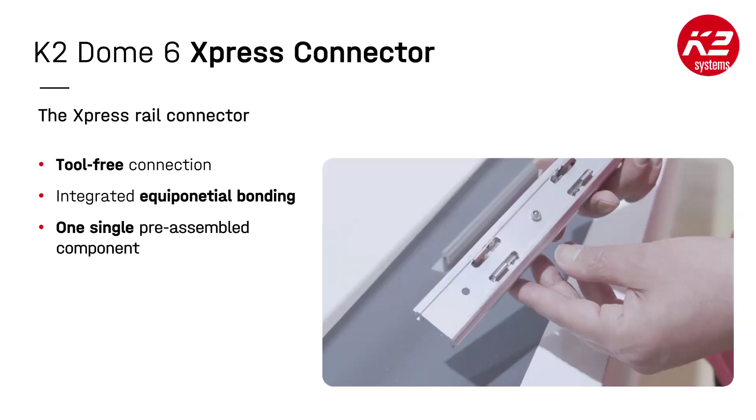We want to design our Xpress systems tool-free, so that everything you can install without tools, just by clicking it. Let me show it live, since the video is going and going. This is our new Xpress connector. What is the idea of it? Maybe you can understand it.

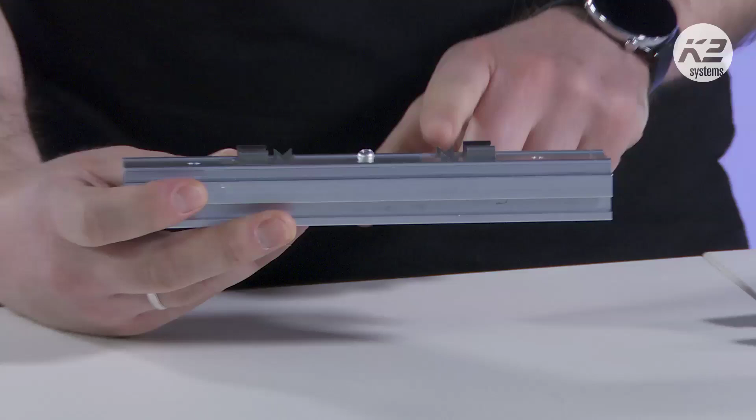We have our basic rails for Xpress systems with drilled holes in the profile, and you have this connector with two types of clips. One of them goes inside the rail, and another one with sharp edges is for equipotential bonding. From the other side, you move the parts.

So to install it, you just put the connector inside the rail, then move it upwards and push it inside. It clicks in, everything installed, no tools needed. Then you get the second rail in the same way, so the rails are connected without any tools. You can also take it out by the thumb, push it to the top, and remove it.

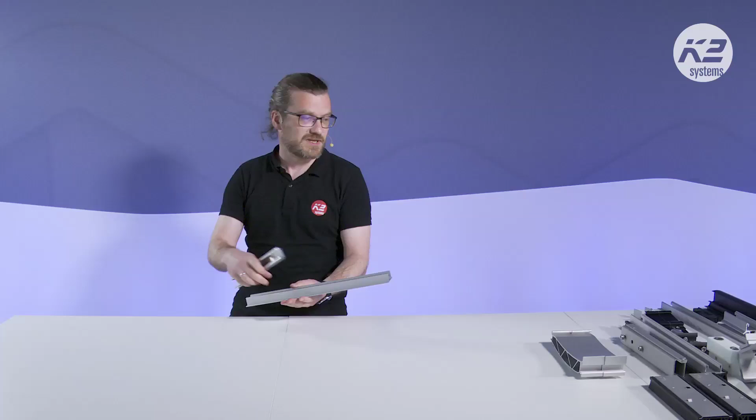As you can see, there are two options: it's not only a tool-free connector, but also equipotential bonding without additional components, without TerraGrips.

Our next important update is our new system, Xpress LS system. As you know, modules are getting bigger and bigger, and modules bigger than 2 meters are usually not allowed to be clamped on the short side, and especially not in the corners on the short side, as in our classic and Xpress systems.

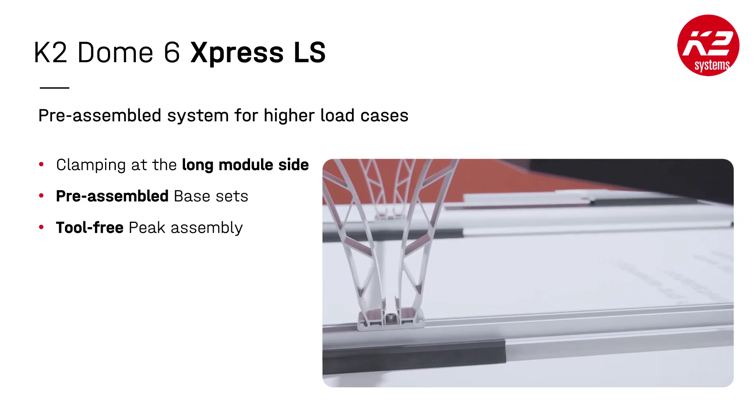We already have our classic LS system, which clamps the modules on the long side. Now we developed the Xpress LS system, so you can install it much faster and simpler - I'll show later how to do it. The idea is the same as for our Xpress systems: you get pre-assembled rails and just have to click the pieces in.

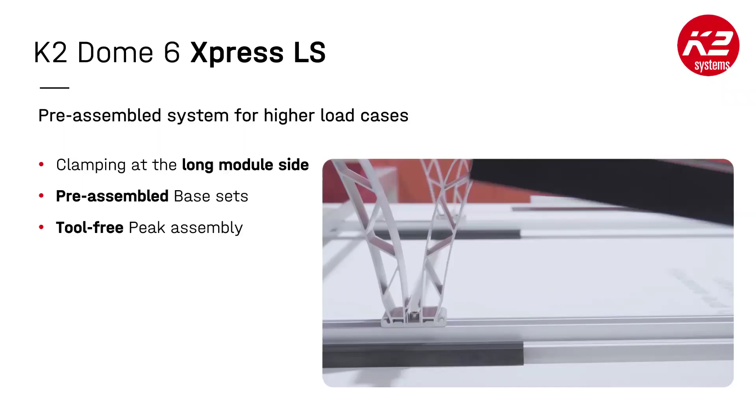Regarding the price, I checked already for some of my projects. I'd say the difference between classic LS and Xpress LS is something about 10-15%, so it's really a good deal. If you think about how many labor costs you'll save, it's really sufficient. So check it, try it - I'll show you later how to design it in K2 Base, because it's already live in K2 Base.

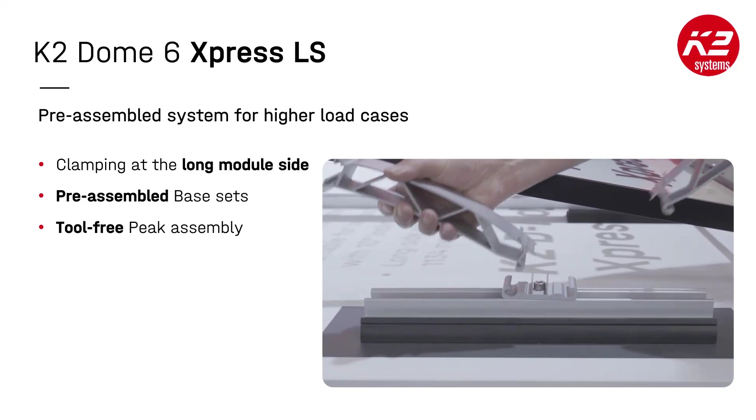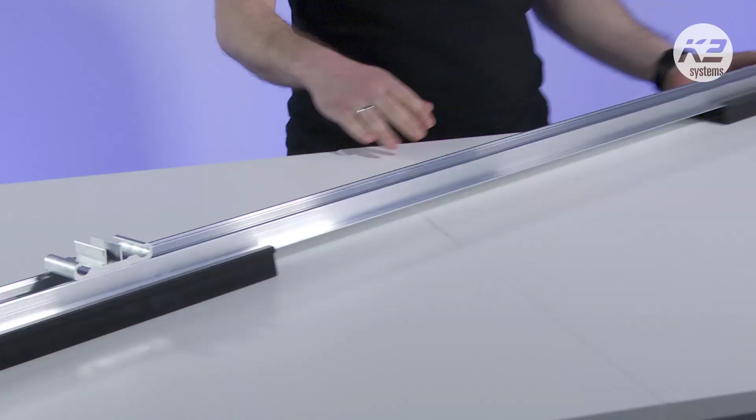But now let me show you the rails, the Xpress system as it is. As you know already from our Xpress system, everything comes pre-assembled. You have the rail, and on the rail are already installed our mid clamps. The SD is already installed, and here are mid clamps to mount the pieces. Everything is pre-installed, you already have the correct distance.

Important to mention, the Xpress LS system is only for modules with 1134mm module width - so it's only for these models, but nowadays almost all models have this width. And it's for modules up to 2.5 meters length, so really long modules. Installation of the pieces is similar.

It's also important to mention that we have different SDs here. Do we have something to compare with the old one? Not really - do we have some old SD? Wait a moment, we will get it for you.

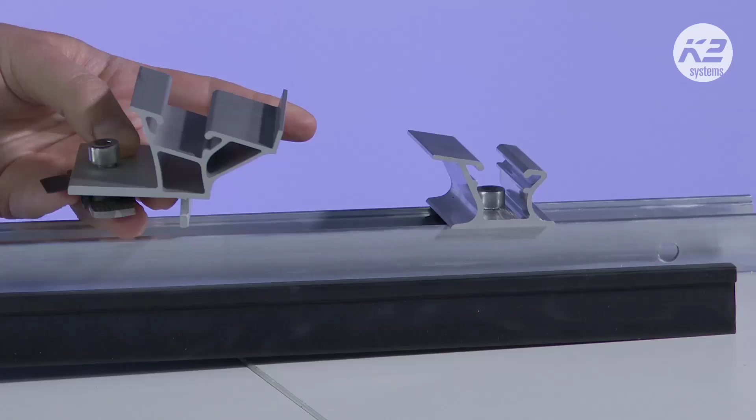So maybe just to compare, here's the old one, here's the new one. You will see that it's smaller, with less material, so it's also a bit cheaper. You will save a bit of money on it. And the same here with our mid plate, it also got a bit smaller with less material. So installation is now a bit different, but quite the same as it was.

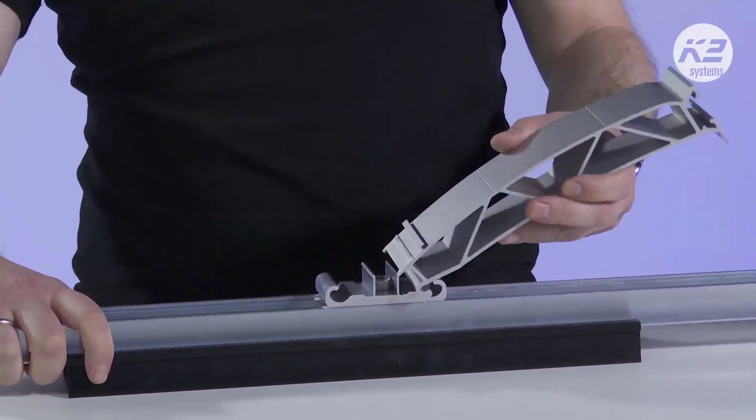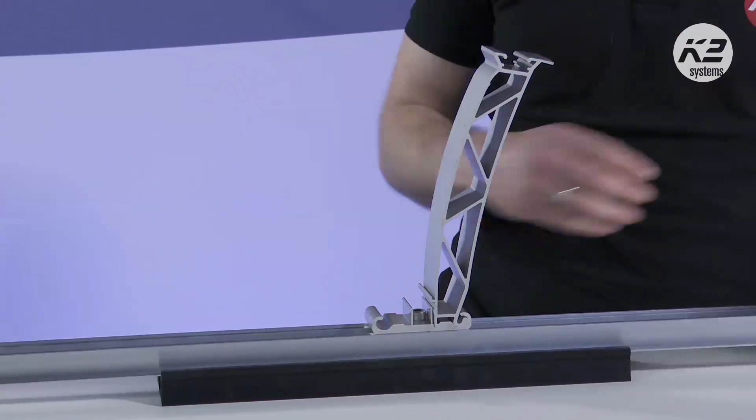You just click the peak in, here, and just here as it is. Now it is in. Now it's installed. You don't need any screw, because if you put the module on top and connect it by clamps, there's no way the peak will go out again. And the same with another one. So now you just put in the clamps, and you can install your modules. In the same way, you can get them out if you need.

It's very simple, as I mentioned, without any tools. No screwdriver, anything.

So maybe let me show it in Base, how to find it in Base, how to design it in Base. So let's maybe create a short project. I don't know, somewhere in Brno, maybe.

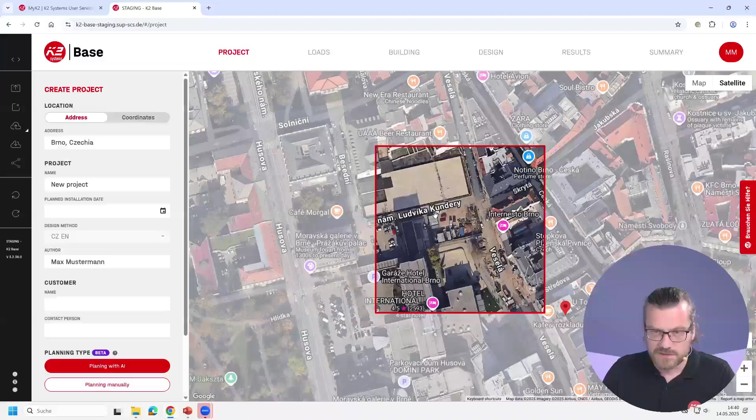Oh, there's already a nice flat roof. So let us check this. Take this one.

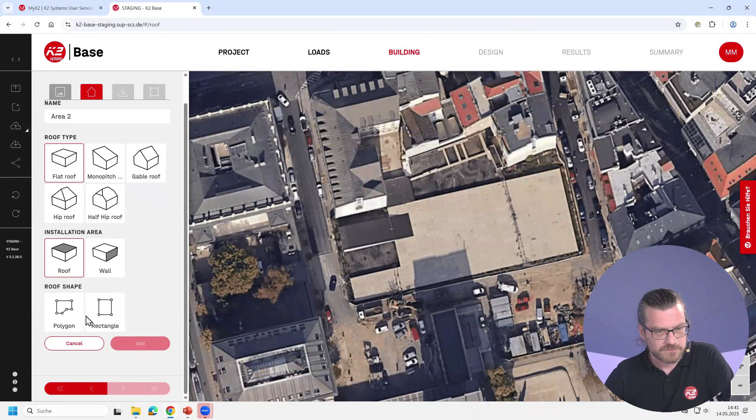I will not explain the meaning of all these options to select, we will do it in our usual webinars, like for flat roof, for example. So here, flat roof. Just design the roof.

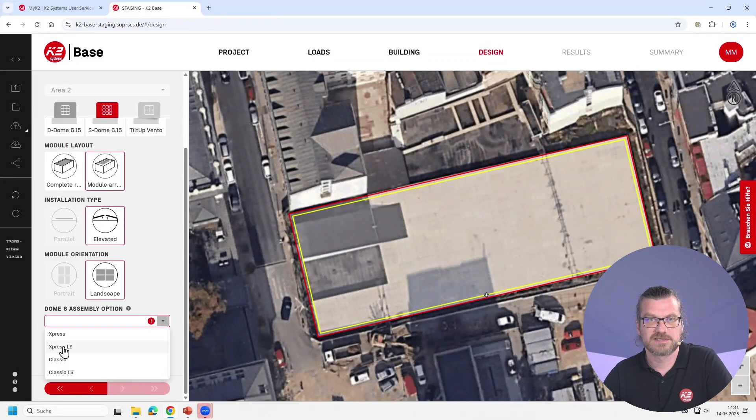Now here you have the option to select the system. You select D-Dome 6.15, and now you can select Xpress LS system here, and you just put it on your roof.

Another advantage of our Xpress systems is that bigger module blocks are allowed in Xpress systems. So maybe you will be able to reduce a bit of ballast with it as well.

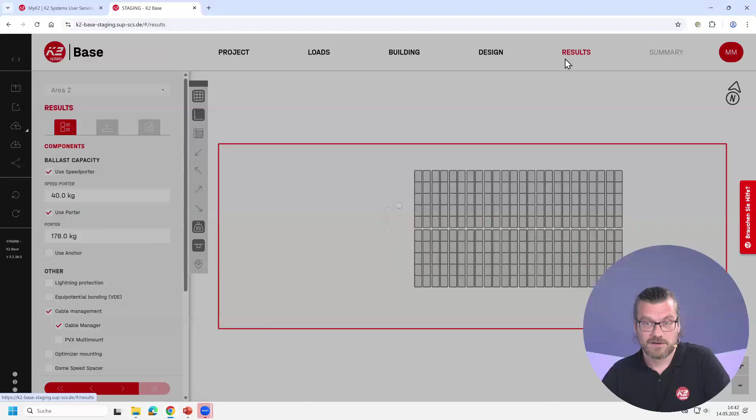Under results, or maybe not under results, but in our bill of material, you will see that we get here our basic set, the same basic set I just showed you. And here you will just need additional peaks. And the system is ready to go.

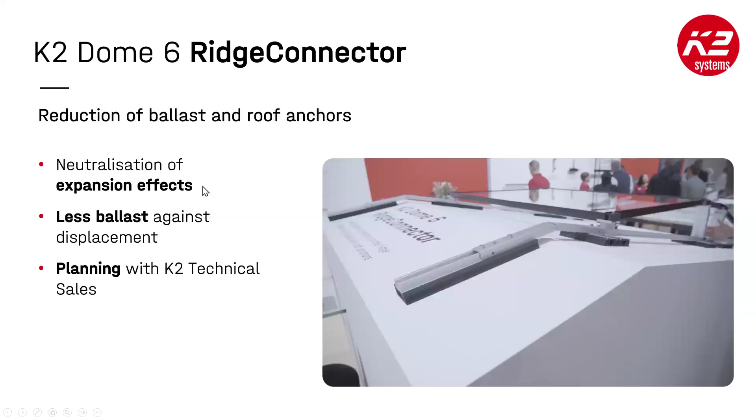Let us proceed with our presentation. The next part we want to present to you is our ridge connector. Here is a video from our Intersolar booth.

The idea of the RidgeConnector is very simple. As the name says, it's to connect the rails over the ridge. We can calculate it manually for you already. It's possible to install this one for roofs above 3 degrees until 10 degrees.

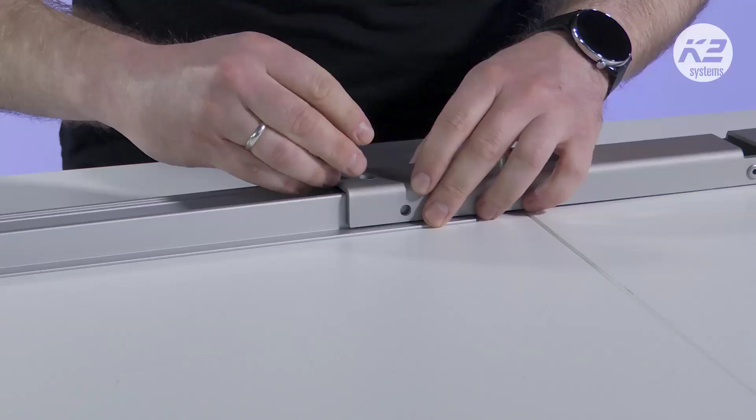Installation, you will see it with our well-known MK2 nut. Just put it inside the rail, and fasten it by 2 screws, in this case by 2 MK2 nuts, 2 screws. I will show you only with one. It's already installed.

The idea of it is to reduce the number of anchors, or maybe avoid anchors at all, because this ridge connector will replace the anchor, so it will keep or protect the system from sliding down, what our anchors usually do. But I will say right away that the ridge connector will not replace ballast, because ballast is also working against uplifting, and the ridge connector is not working against uplifting. So you will still have to use ballast, even connecting module blocks over the ridge.

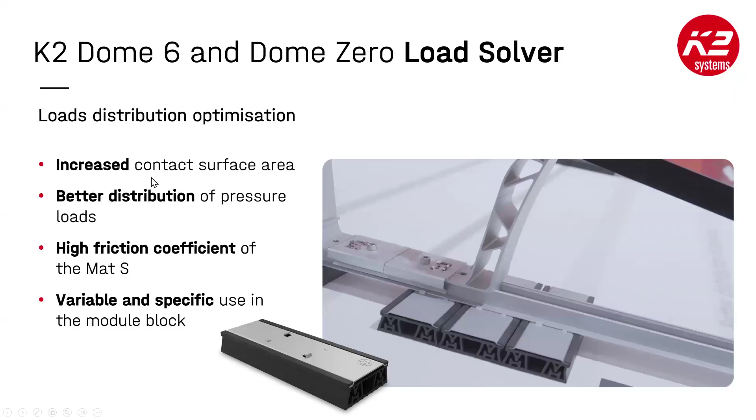Okay, what else we showed at Intersolar? It's our load solver. The idea is very simple. Maybe you can show it here on the video already, but maybe just for understanding.

So we are talking now about pressure on insulation, because if you had soft insulation, you may not put a lot of pressure on it, because otherwise it will go under the pressure, it will bend a bit, it can be damaged. Insulation can be damaged, foil can be damaged. And can you see this, our Mat S feet?

You can put more Mat S feet on the rail, but here there's not enough space to put, like, I don't know, 4 additional Mat S feet. And this we can now solve with our load solver, because it's installed not parallel to the roof, but perpendicular to it.

Maybe I will show it here right away. You just move it in. It's already installed. And as you can imagine, you can install a lot of them, because you have space enough to install, I don't know, maybe 6 or 7 of these. And in this way, you can solve your problem with soft insulation.

It's also a good replacement for anchors, because we now have systems for soft insulation. It's a good solution if you don't want to install a lot of anchors. It could solve your issue.

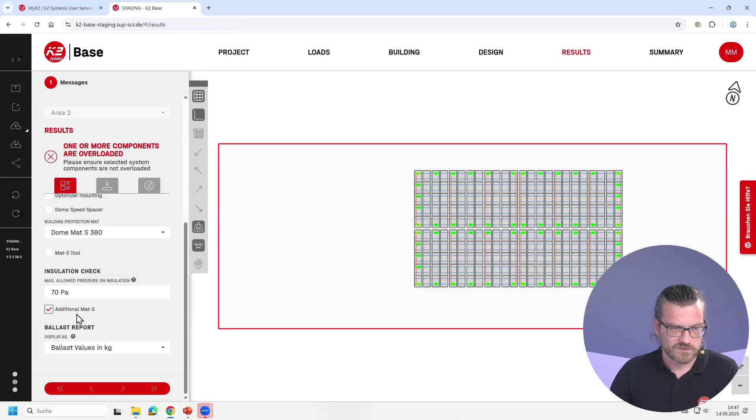Let me show it better to you. Let's go to bill of material. Here we will get additional Mat S because it's not shown. Let me select it. So you see the issue is still there. It wasn't solved because the value I put in is very soft insulation. But you will see here that we probably have additional Mat S. I hope so... no, not really, but it should work for sure for the classic system. Let me check it.

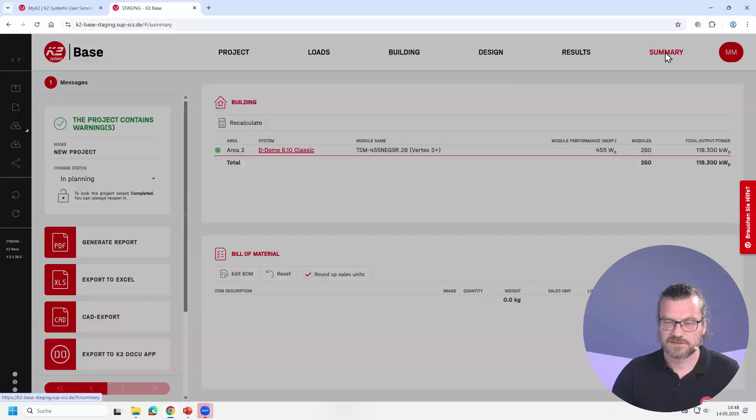Let's remove the additional Mat S. It's not here. How many Mat S do we have here? 380, so a bit higher value. Let's try to solve it with additional Mat S. Now you can see that we have 200 more Mat S feet, but the issue still exists.

This is the reason we developed this load solver. We can calculate it manually for you. So if you have a project and you know the maximum allowed pressure, like in this case 70 Pascal cannot be reached, just send this project to us, create a K2O file, send it to us and tell us what the maximum allowed pressure on insulation is. We will check it, design the project for you, and send you a static calculation, and tell you how many load solvers you need to install in your project. So maybe you will need fewer mats, but additional load solvers.

Let's come back to our presentation. The next point is our WallPV.

We are starting to integrate it into our K2 Base. At the moment it's integrated in our test version, where we can show it, design it and test it. Apparently it will be live in K2 Base, available for everybody, maybe in 4 to 6 weeks. That's an estimated time, but I can show you already today how it will look.

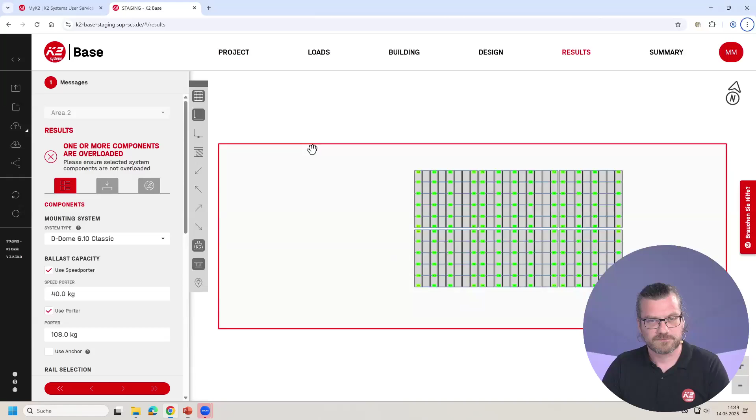It will only be available for flat roof, because if you select monopitch roof, you have no other option, but selecting flat roof, you also have wall. You have to select wall, and select the material of the wall. Let's stay on concrete, for example.

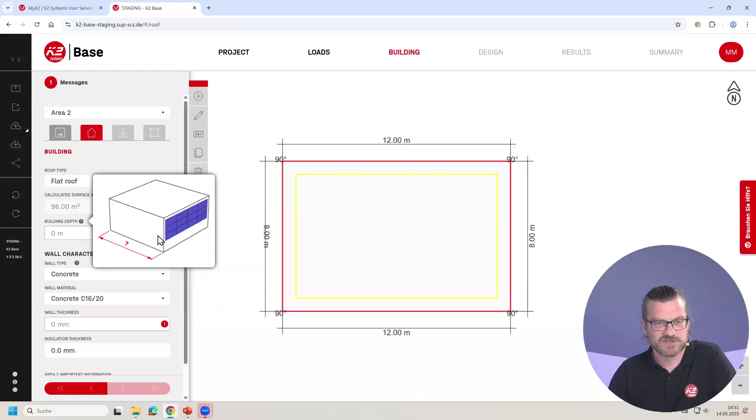So you will always get the same size of the wall, like 12 by 8. But as you know already from our base for roof, you can always adjust the size, making it a bit smaller. What's very important here is building depth. This is the wall where you will install the panels, and this is another wall. It's very important because we need to calculate loads on this wall, and there will be two different load areas, depending on the depth of the building and the length, the size of the building. There will be different loads on the wall where you want to install your PV panels.

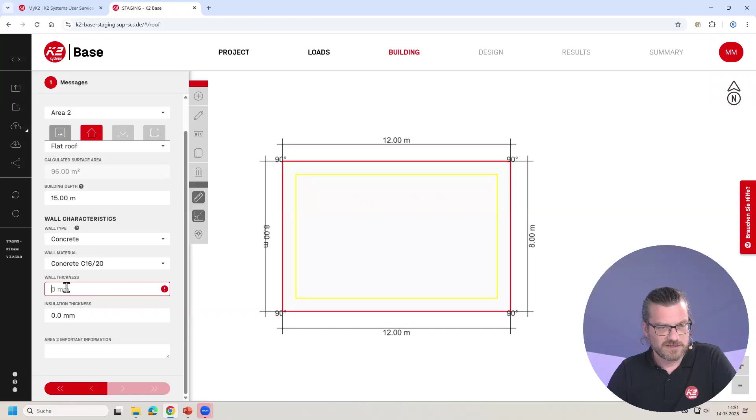Here you can already check and select a different type. Here's the wall material, you need to put in wall thickness. I believe 100 millimeters is the minimum. You can also put in insulation thickness here, let's do it with 100 millimeters too.

Now you have to design your system. Again, as usual, you select here the model you want to install. In the next step, you can select the system. For concrete walls with insulation, we offer two types of systems: our perfor rail and our facade rail. Briefly explained, the difference is that the perfor rail is installed on already existing insulation, while the facade rail is installed before insulation, which is installed afterwards, after the fasteners for the facade rail are installed.

So let's proceed with perfor rail. Here as usual, you have the option to select landscape or portrait. Let's do it landscape. Now we have our model field. You see that these edges to the wall, this minimum distance has disappeared, because we have it for our flat roof systems, but we don't have it for wall systems.

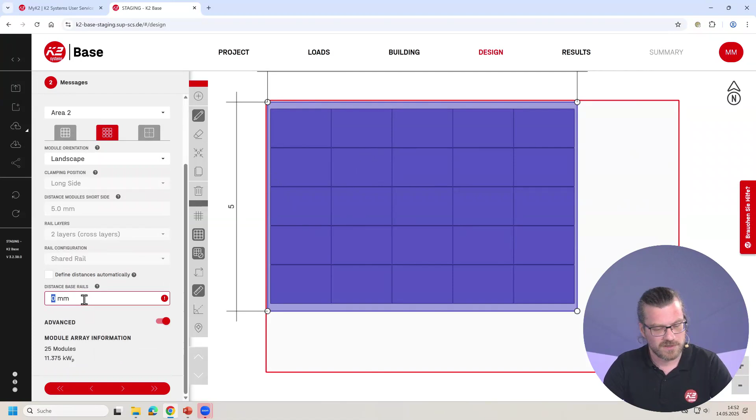And here again you have the option to select perfor rail or facade rail. You can also, I believe it's already working, select the distance between base rails, in this case perfor rails, and let it calculate. Another point, also known from our roof designs, is that it's also possible to draw obstacles, for example something like a door here, or maybe a window somewhere there.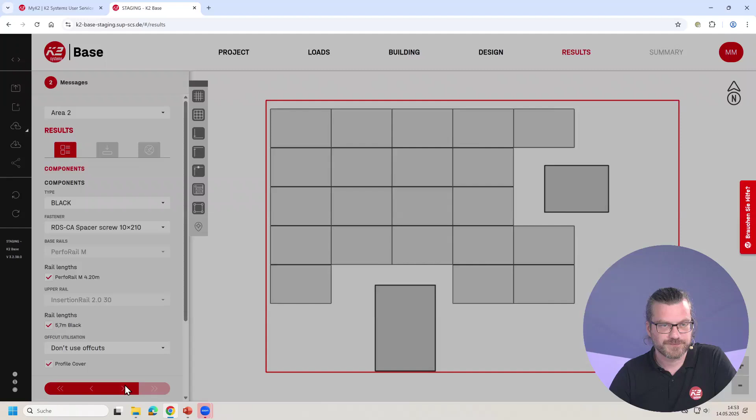You can also put thermal cuts or change thermal cuts. At the end, as you already know, you will get this calculation. So you can see these two areas, white area and yellow area. Yellow area is the area with higher loads, and white area with lower loads.

Here you select your screw to install the PerfoRail. Yeah, so we have them in different lengths.

Here you can also select a color of components, if you want black components, black insertion rail, or silver. Silver components are a bit cheaper, but if you have black modules, it's very nice looking to install it with black insertion rail, so you get a completely closed black look.

Here, as usual, you can select the length. PerfoRail we have in only one length, so you cannot change it. And insertion rails we also have in only one length.

At the end, as usual, you will get a bill of material. So let us select our site. Here's our PerfoRail, screws, insertion rails, and so on.

Already well known, you will also be able to create reports. I believe it's not developed till the end now, so maybe there are some empty spaces by now.

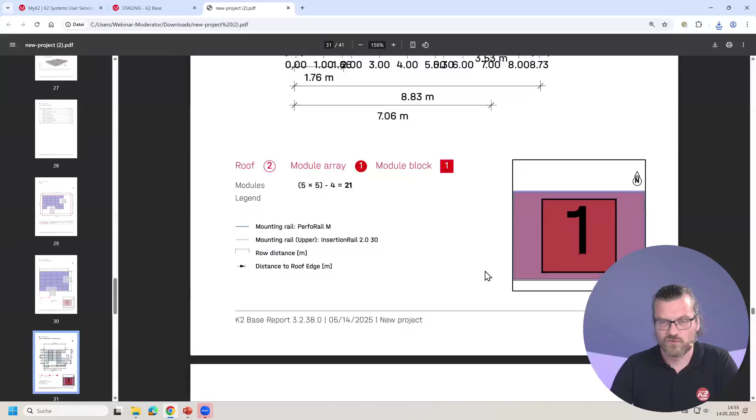And here again you will get utilization from base rail, from upper rail, and from fasteners. It's already a well known way to calculate it, to present it to you for static calculation, and so on.

So, as I said, it will be available in base probably in 4-6 weeks.

Oh yeah, it's a nice demo video how to design it and then put it on your wall. Exactly, it's our reference project. It's a very nice one.

Let us switch back a bit, because here we have some additional news for our facade system. We have developed a new cross connector, the so-called cross connector T. This one, we have the old one somewhere.

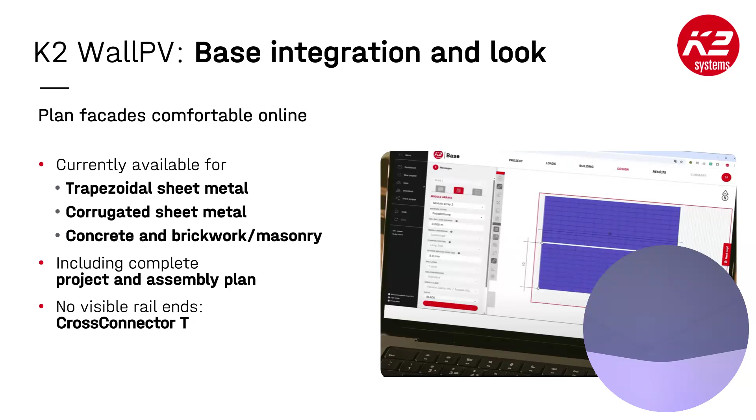Not really, only here on the wall. So yeah, you can compare it. It was our old connector, and the issue, or maybe not the issue, but you can see that here you have a big space for a cross connector, and here is also our anti-slip clip.

This anti-slip clip we also have in silver color, so it's not very nice looking if you have on the bottom of your completely black facade PV plant such a silver clip and cross connector. So we developed this one.

The idea is that it can hide the anti-slip clip, which is installed inside it. Here you additionally put your insertion rail. So you see now it's everything completely black.

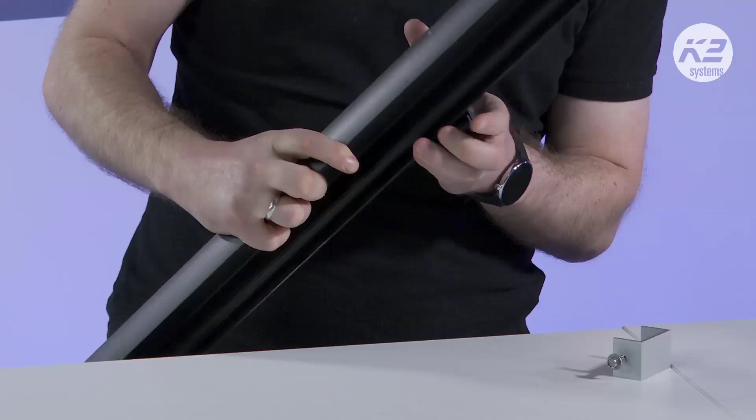This T shape is also designed without a second screw, to install this T connector on the edge of the rail.

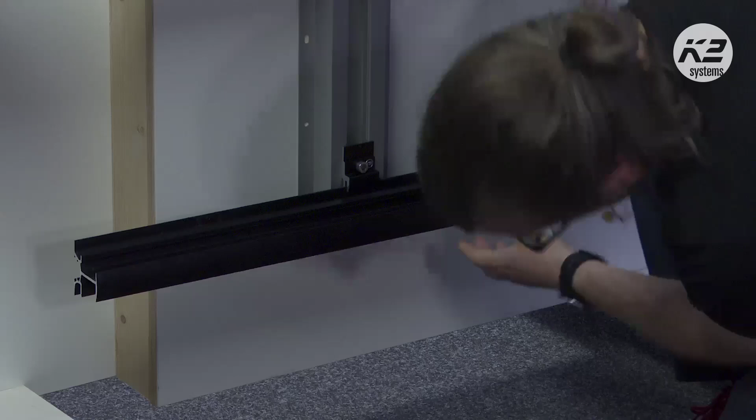Now let me put the rail inside. And now you see that here's nothing, here's a completely closed black look. There's no space for anti-slip or cross connector, completely closed black look.

And also something new for our facade, for our insertion rail: it's our new end stop. So this is the old one, it was with a screw. The idea was that you put it here and screw it in to fasten it.

And our new end stop is also a tool-free option, a tool-free idea of how to install it. You will see that it has such sharp edges here.

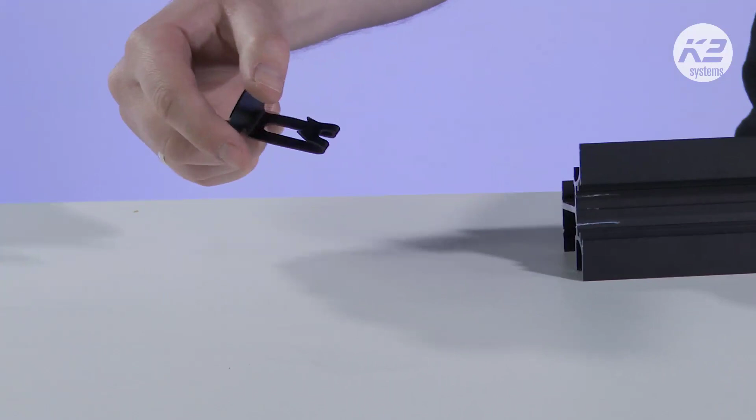Can you see it? Oh no, it's my black shirt, or maybe here on the table. It's sharp, and you just, I would say, hit it inside. Yeah, so it's already installed. You can be sure that this way, or maybe I will also put it on the table, it's the end stop for your module installed into the rail.

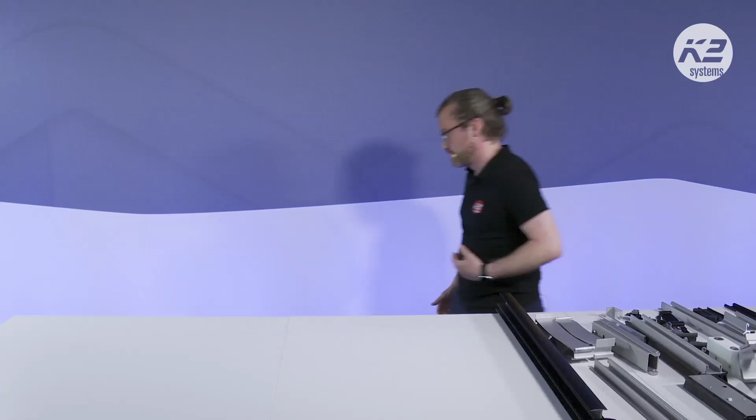So let us proceed. Perforail, do you want to show perforail again? I don't know, maybe yeah, if Klaus asks to show you perforail, I'll do it with pleasure. So already shown in our facade webinars, it's our quite new solution, perforail.

What is ideal perforail? It's like a long multi-rail with holes, for concrete walls with insulation. We have different lengths of screws for different thicknesses of insulation, and you just screw the screws inside your insulation into the concrete wall.

What's important here is the inclination of the screw. The first and the last screw are at 90 degrees, completely vertical, and the screws in between are at 15 degrees. It's not always easy, maybe never easy, to keep this 15 degrees.

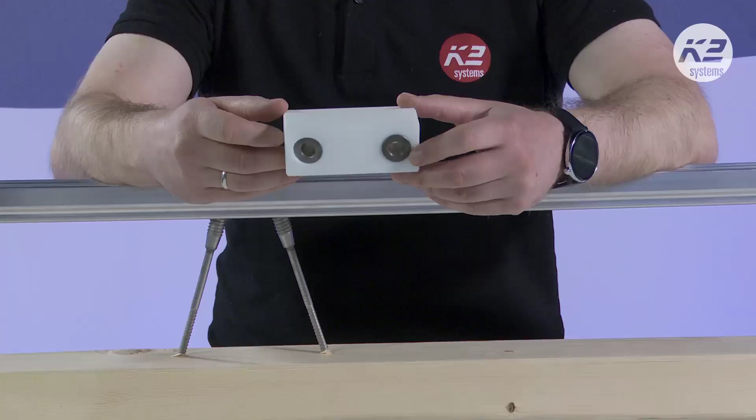To install the screws or drill the insulation into the wall at the correct angle, this 15 degrees, we developed something I'd call a drill help - a component, still without a name I believe. At Intersolar we presented three of them in different materials and asked our customers which one they loved most. It's also very simple, you just click it in.

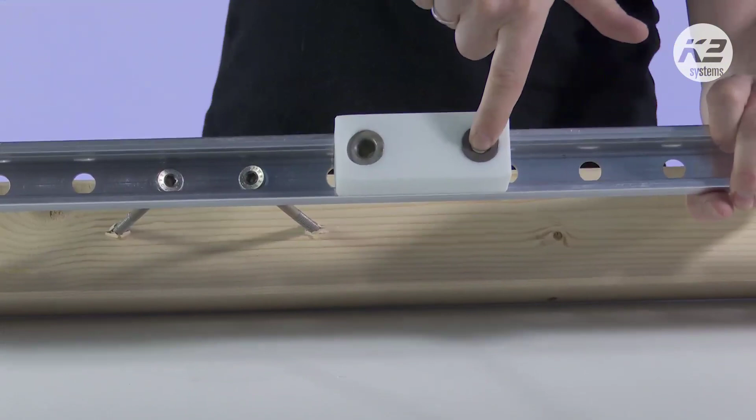Just click it in, and now you can drill at 90 degrees, or at 15 degrees. If you need it in another direction, you just have to remove it and move it again inside. Now you can install this screw.

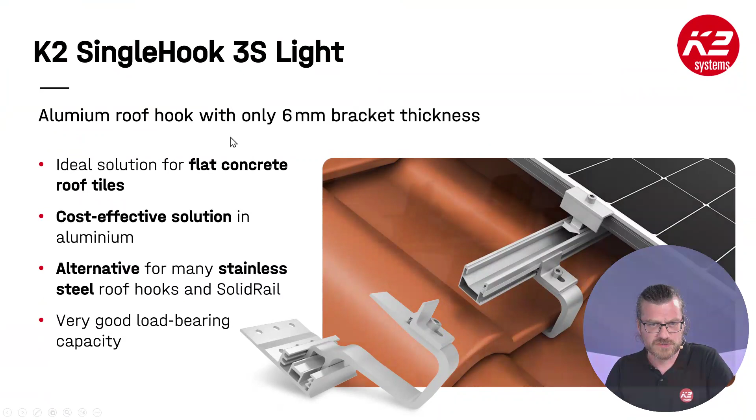Okay, let us proceed. This is our presentation, our new products for pitch roof. It's our 3S light hook - here's our wall from Intersolar. Let me show you the difference between 3S light and the usual 3S one. Let me remove this.

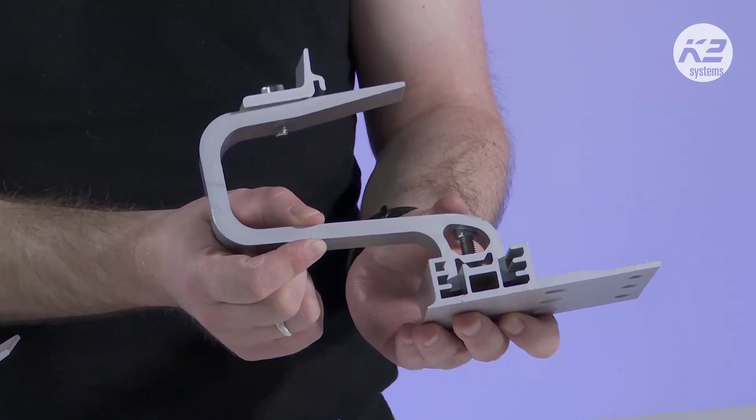What we tried to do is create a hook which will be as good as the known 3S hook, but significantly cheaper, and maybe also more suitable for concrete tiles, because in our old 3S hook the shaft is quite thick, so you had to process the tiles a lot - cut a big part of the tile to install this 3S hook properly. With the 3S light hook, you'll see it's much thinner now, only 6 millimeters I believe.

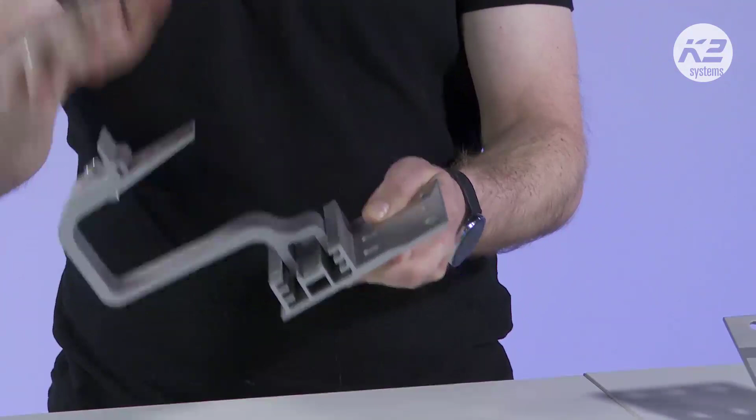So it's easier to install, less processing of tiles, but also thinner so it needs less material - it's getting cheaper. Another point is this screw to mount the shaft. It was already well known that this screw isn't really needed, because if you have loads coming on the screw, there's no way it will move to the right or left since it's already under load. So we removed this screw and created a simple solution.

You just move it and install into the next. This hook will surely be statically not as good as the old one, but it's still very good statically - I'd say something like 80% of the old one.

So try it, design it in K2 Base - I believe it's already there, but we can check later. It's a cheap solution, or cheaper solution, than Xpress. It's easy to install, so it's our new product. I would really recommend it. It's already available in stock, so you can already order it from us.

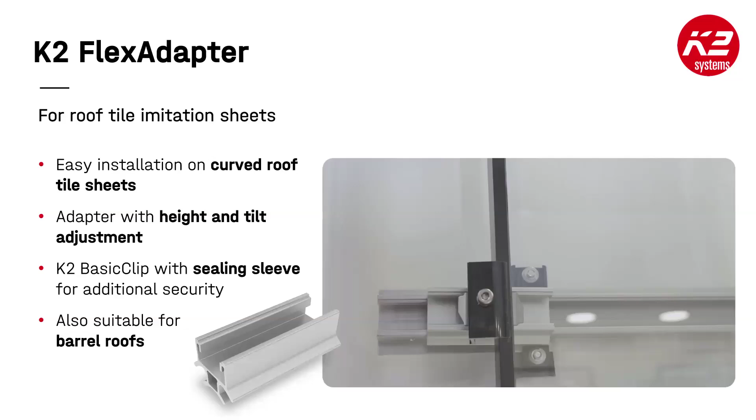Next point, my most favorite point - I waited for this solution already for a long time. It's about our tile imitating metal sheet. What is this? These are like metal sheets with a special shape imitating tiles.

The problem with it is that every next tile goes up a bit, something like 2 centimeters usually, so it's like going up, up, and up - you can imagine it like stairs. If you install the module, you'll have a difference in height, and when you clamp it, you create great tension on the module.

We thought about how to compensate for this tension. Another problem with these tile imitating sheets is that they have a curved crest. We tried to go there with our multi-rail CSM, but with multi-rail CSM we couldn't solve this issue with the different height of these tiles. For BasicClip, sometimes the crest was just too narrow, so there was no way to install properly, because we say the surface here must be at least 20 millimeters this way. If it's curved, probably it won't install properly.

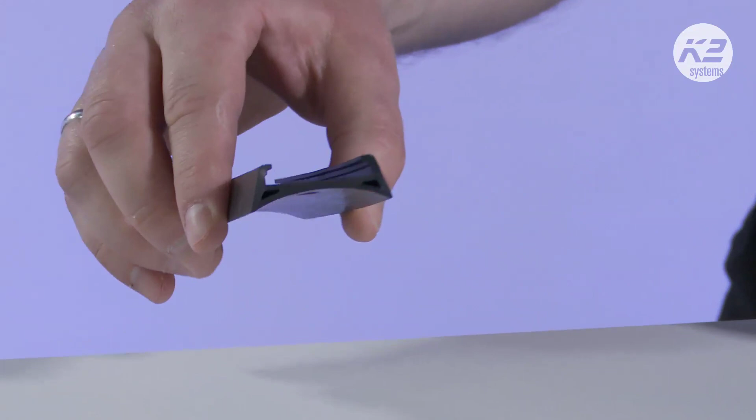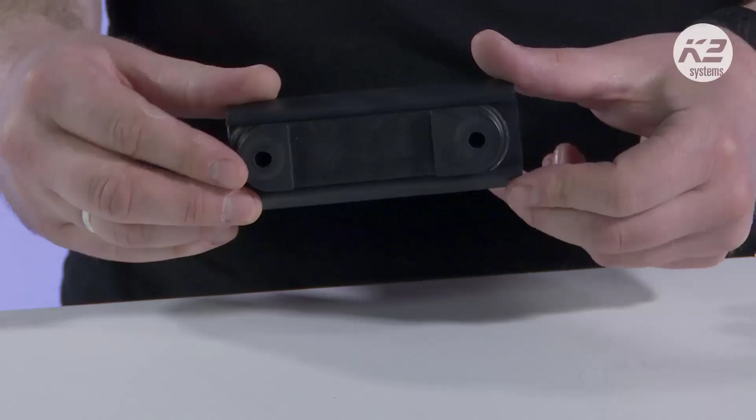So we designed two new products here. First is their protection clip, I don't know how to call it - it's for water tightness, you can see it here. It's also a rounded shape to install it properly on the crest of this tile imitating sheet. You just put our usual basic clip inside, screw it as usual with two screws, then we install our basic rail.

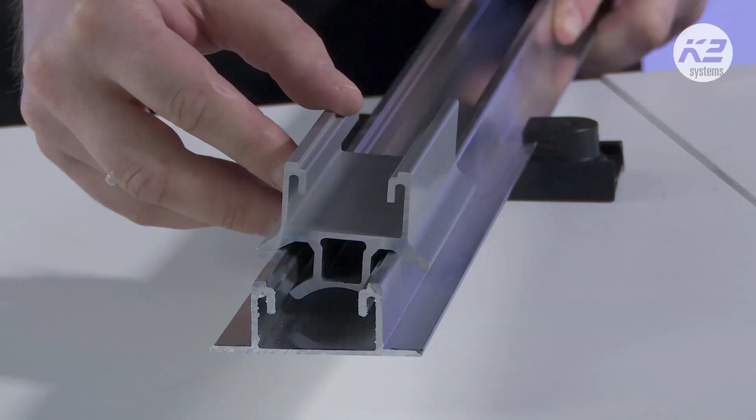Into the basic rail, you installed our new flex adapter. What is the idea of this flex adapter? You'll see it here - you can compensate this difference in height of the tiles. You can put your module not completely even, but at an angle to the next tile, and this way you will avoid tension on the modules.

Great solution, finally we have it. It will take maybe 2 months until we develop it to the end, because we are now working on some end stops to prevent this flex adapter from going to the side. We will also put it into K2 Base. Apparently somewhere in August or maybe September we will have it. I'm really happy about it, I hope you too.

Especially now, in Eastern European countries such tile-imitating sheets are very popular, and it was very bad that we didn't have a good proper solution for it.

Another news - we will try to replace our old insertion rail, insertion rail 30, 35 and 40, with our InsertionRail 2.0. InsertionRail 2.0 you know already from our facade solutions, but now we want to implement it also in our pitched roof solutions. On different roof types, for example tile roofs with solid rail, trapezoidal metal sheet roofs with multi-rail, and also trapezoidal metal sheet roofs, we want to use this new solution to install insertion rail directly with basic clip.

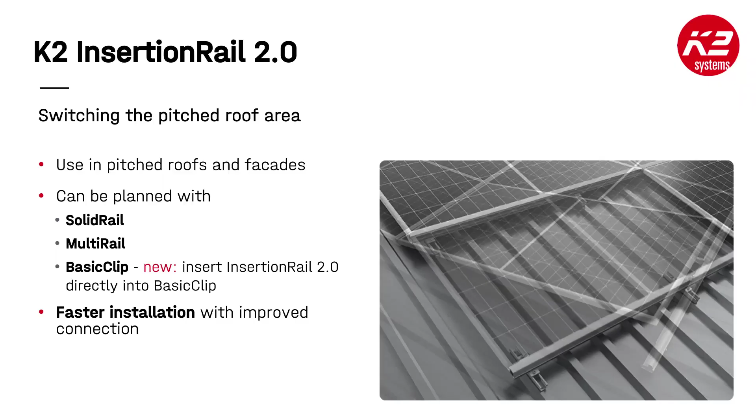Previously, insertion rail on trapezoidal metal sheet was like two rail systems - you had to install multi-rail, and on the multi-rail you had to install insertion rail. So it was a two-layer system, and now we will implement it as one rail system. You will install our basic clip from our basic rail, and in this basic rail you will just install your insertion rail. It will look the same way the basic rail does, so you will get a very nice looking system with insertion rail, but without a second rail layer.

So here we have such short updates. What's also new - probably you already know about some of these solutions, some of the systems, for example multi-rail and S-Dome 6. Classical S is already in base, I believe since maybe 1-2 months, so maybe you already know it. Everything is online, you can find assembly instructions and so on our webpage.

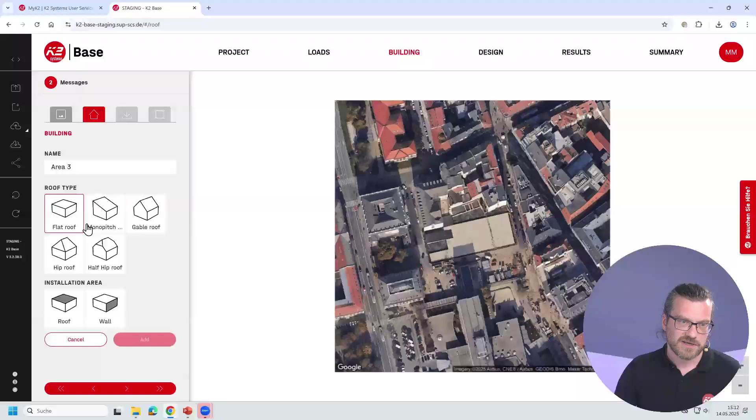Maybe important to know if you're trying to design it, because some customers are asking how to find it - if you want to create an elevated system on a flat roof. Usually, or earlier, we had an option to select trapezoidal sheet roof only for our pitched roofs, for monopitch, gable roof, or these shapes. Now, if you want to use an elevated system, even if you have a roof with 7-degree roof pitch, you still have to select flat roof, and select here trapezoidal metal sheet. And then let us imagine our roof here, as usual.

Crest distance, well-known information, as you usually do for trapezoidal pitch roof. And now you will be able to design here D-Dome with the basic rail, S-Dome 6.10 with basic rail, S-Dome 6.15 with basic rail, or S-Dome 6.10 with multi-rail. It's not possible here yet, but it's already in the live version - in the live version you can already do it.

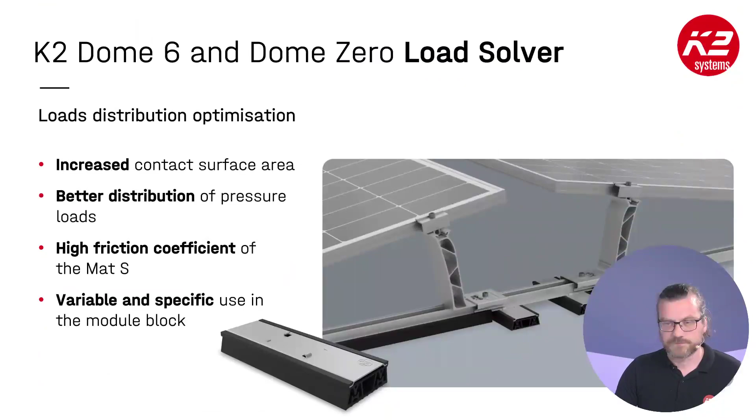Let us go through the presentation to the last page. So there is also some of our news - we also implemented some new inverter tools in our K2 Base, so you have direct connection from K2 Base to Huawei or Kostal, for example.

Flex connector - what's the Flex connector? Sika partnership. Maybe if you visited our last webinar regarding flat roofs, you know already about it. It's a roof-parallel solution for membrane roofs or bitumen roofs. We install on this roof our SingleHook on anchors. It was developed in cooperation with Sika.

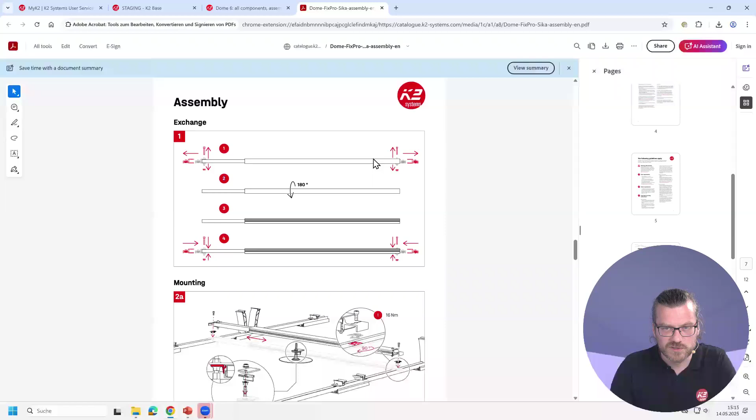The main difference is that you will have to adjust a bit our Fix Pro, by taking these holders out and putting them again turned upside down. See it? Turn it around, and now you can install the Sika anchor with Fix Pro, and you will just have to put the climber also in a different position.

Okay, digital - so our artificial intelligence assistant, I will show you it right away. MyK2 - we updated a bit our MyK2, so if you use MyK2 you will already notice that it's a bit different now. And maybe also my second favorite news from Intersolar - we extended our warranty to 20 years in case you save your project in DocuApp and everything is verified.

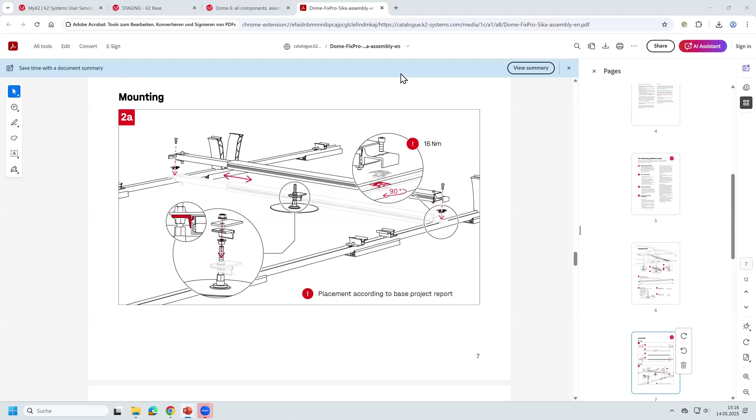What's important to mention is that our Kai is very young, so it's possible that the answers will not be correct or not really good. But you still have the option to contact us, and we will try to improve Kai so it always provides correct answers, but we still need time for this.

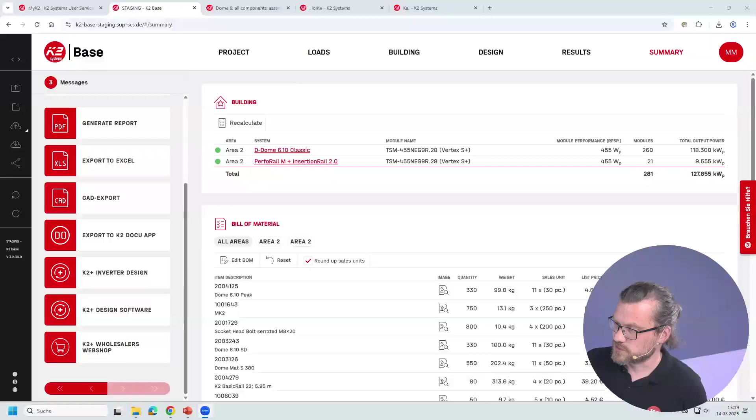So the first question is if our new Express connector is only for Express rails, or if we can use it also with Dome Classic.

At the moment we have no rails where this connector will be used, but I believe it will be used only in Express systems. Klaus, what do you think? Also in Classic? It's supposed to be only for Express systems. I don't know, maybe we will see if it will be very popular.

It will be very good. Maybe we will also drill our standard rails so you can install it also in Classic system. Yeah, but I believe it's not possible in Classic system because you have to cut your rail, so we are not able to put the holes at the correct distance from the edges of the rail. So this is the reason it will be only for Express system.

Another question about our Express system, Express LS system - how different is it in length? Yeah, surely it's a bit longer because the space between peak and SD is a bit bigger, since you need to clamp the modules on the long side, not on the edges on the short side. So the distance between SD and peak is longer, and by this reason Express is also longer.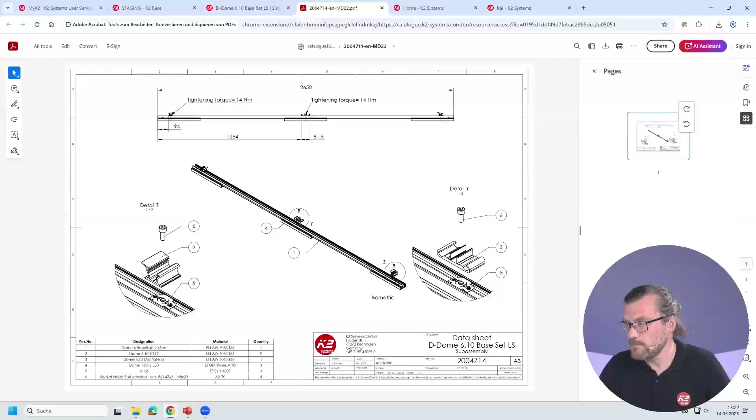What Sika anchors could you show? Yeah sure, we can show you Sika anchors. Sika has two types of anchors, for foil and for...

We have some technical issues. I hope we are back. Are we? Yeah, so we believe we are back.

So let us proceed with Sika anchors. This is our Sika anchor. We have two types of Sika anchors, for foil and for bitumen covering. The idea is very simple - so you have this plate, you install the screws through your insulation, usually into the trapezoidal metal sheet under your insulation, under your foil. So you just screw it through, and then you put a piece of the foil on this steel plate, and you weld it, so there is no possibility for water to come inside.

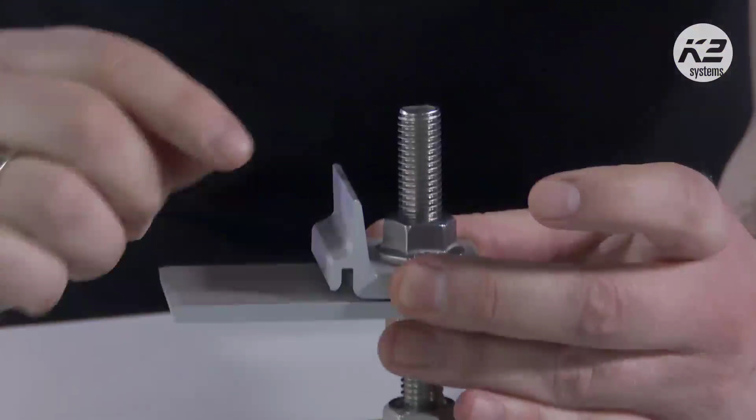And here you will see our usual clamp and adapter plate, so a single rail EFP is used. You install our single rail here, and as you saw in our Dome FixPro, you will have to put it the other way around - turning it, installing it in this way.

What is important to know for Sika anchors, and I'm always mentioning it, is that Sika anchors have two components.

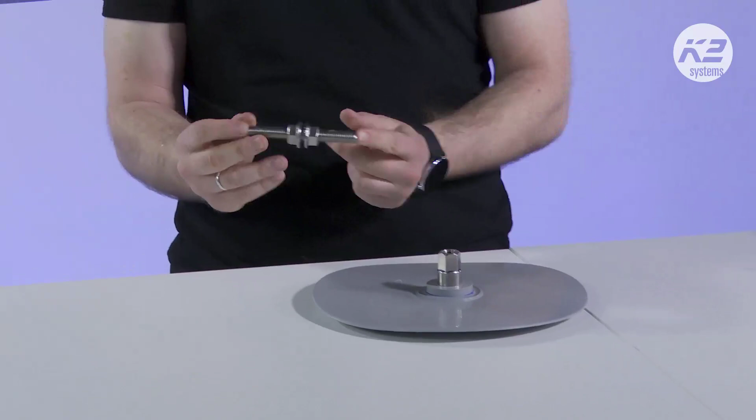Is this the plate and the leveling set? Let us remove our components. Yeah, these are our components, and these components must come from Sika - this is the plate and this leveling set with nuts. So please keep in mind that all these components must come from Sika and not from us.

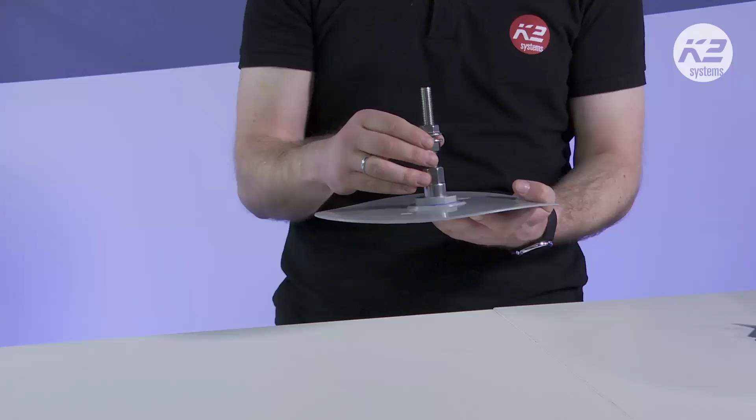Compared to Lundberg or Solomon, better or worse - I would say CV Lundberg usually can bear a bit more load, and Lundberg has a bigger plate, so it's also better for pressure on your insulation. But the difference is almost nothing, so it's also a very good solution, and it's not so expensive - I believe it's the same price as CV Lundberg. So surely if you already have Sika foil on your roof, it's always better to install a Sika anchor.

So what questions do we have? Can you use the ridge connector inverted in a valley? I don't really understand this question. Hans, do you understand it? In a valley.

I would say at the moment you can use this over-ridge connection only in our Dome systems. And you have to keep in mind that the rails must go from bottom to top, not from edge to edge, because you have to connect them on the top with a ridge connector.

When can we expect the auto roof detection sharp version in K2 base? So we are working on a new roof detection system. It will recognize not only obstacles on your roof, but it will also recognize roofs and roof shape. I believe we can also show it right away.

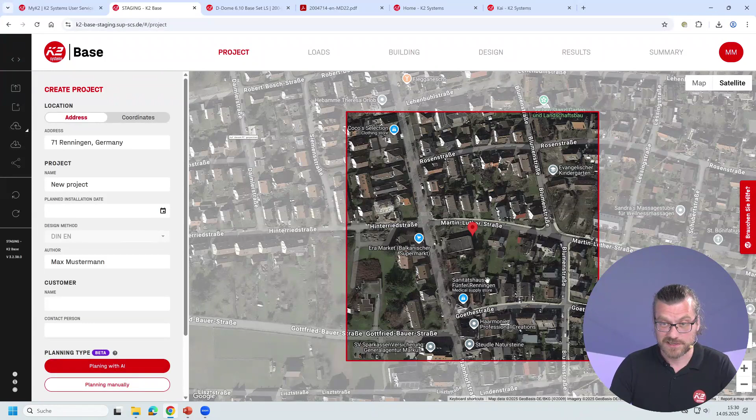Let me create a new project. Let me select something - Renningen. Renningen in Germany. And here you have how it will look. You will select the option with assistant artificial intelligence again.

You still have to select the terrain category. Then in the next step, you will see that artificial intelligence automatically recognizes roofs and roof shapes - so gable roof, monopitch, flat roof. You see, it's already recognized something.

So the idea is that you just select one of the roofs and it's already designed for you. Surely you will have to adjust the size probably, but we are working on making it more precise, so no additional work from your side will be needed.

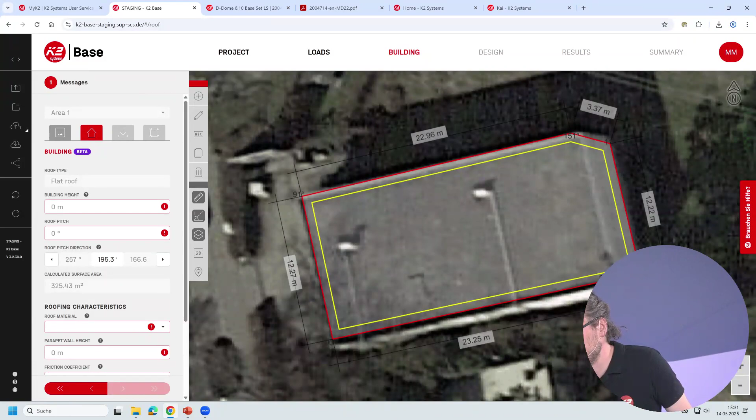What is the name of the new pantile hook? The name of this new hook is 3S Lite. Maybe I will show it here - no, that's the wrong one. This is the right one - yes, this is 3S Lite. So the name is the same, but with 'Lite' added. It's a light version: less material, less everything, less price.

I believe the question about using it in K2 base is again regarding Sika anchors. Yes, you can already select Sika anchors in K2 base. Let me show it very fast.

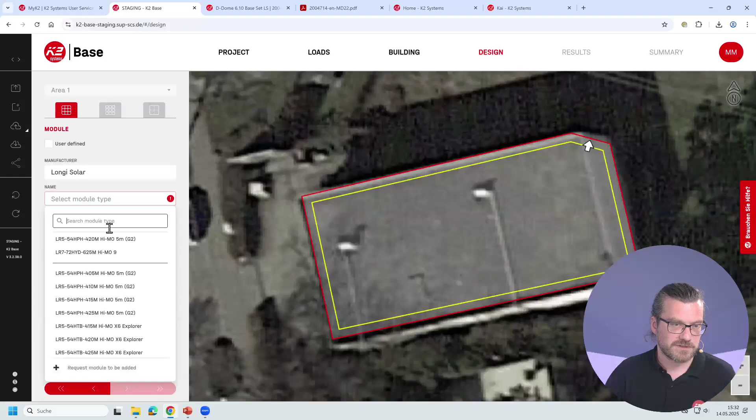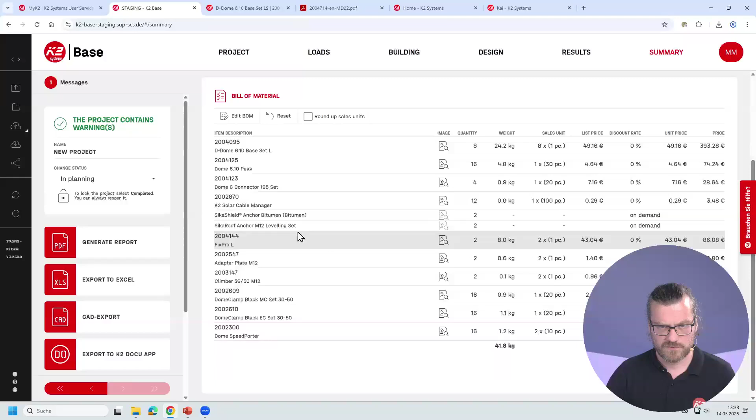This artificial intelligence feature for roof detection is at the moment not in the live version. It will be there - do we have a timeframe for this? I don't think so exactly, but I would say something like 4-6 weeks, because as you can see, it's already there. We just have to do some adjustments, some tuning, and it will be available for everyone in our live version.

The 3S Lite hook is not for solid rail - it is the same as our 3S hook, it's a single hook. Single hook means single rail, so it's not for solid rail, but for the single rail. So the full name of this hook is single hook 3S Lite - single meaning single rail. You can also recognize it on this clamp: you will clamp the single rail here on the side with this clamp.

So now I believe we have no more questions, and we are quite right on time. I hope you enjoyed our webinar today. I hope you like our new products, and I hope you find them as useful as I do. I'm really happy about some of them, especially the warranty extension to 20 years.